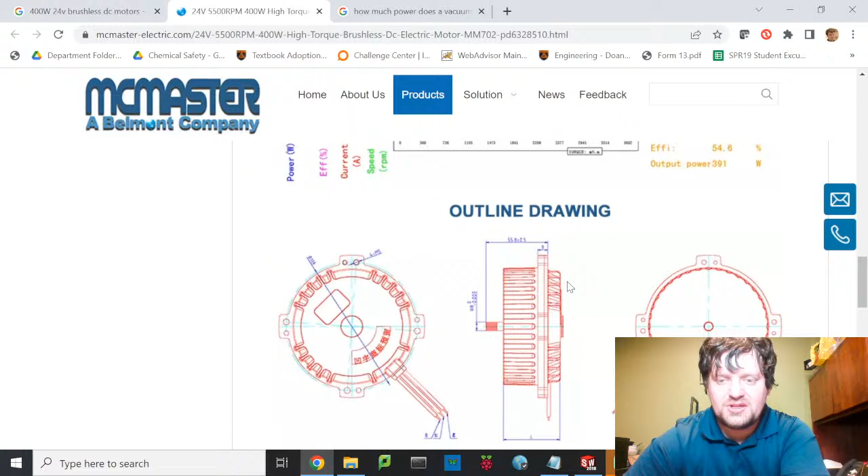So here it'll tell you at max efficiency, here's your speed, here's your current, here's your torque, here's your efficiency. It's just all these things. All of this is really good to know. I'm going to go ahead and take this brushless DC motor, and you'll notice this does have some specifications to it. I can't really see it because I'm blind.

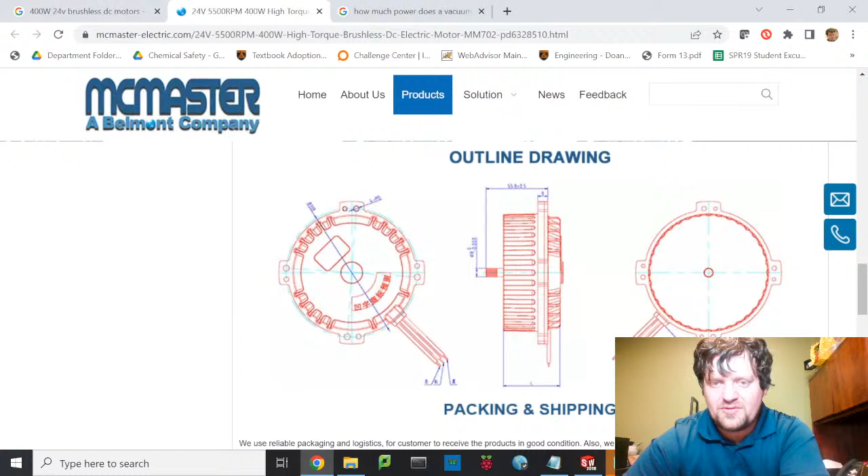But the outer diameter of this motor is 119. Looks like there's a 9 millimeter bridge right there. You have that long of a lead. Wow, it's really not a lot of information. But this does give me enough that I could probably redraw this in SolidWorks if I needed to.

Here's a bunch of the other specifications. So when you're looking up a motor, the piece that you need to have most importantly is this information down here, which gives you your load, your speed, your current, your torque. You need to understand those. Now here I have the ability to pick between these. All of these are 24 volt. All of them have 71 millimeter lengths, which I would assume would be from here to here, 71 millimeters.

Here the power output in watts, we're probably going to want the highest level one, just because. Although it is going to be a little heavier, it is going to have a higher current draw, it's going to have higher speed. These are the shapes of the diagrams. It appears what they did was they gave these values according to the specific models, and then they basically showed, here's what you would expect out of the performance.

So here, current linearly increases as the torque increases. Speed linearly decreases as the torque increases. Your efficiency pretty much decreases as the torque increases, and the power has kind of a parabolic shape. So that's kind of what this shows. You can look up here and find the actual values to plug in and recreate the curves yourself if you really want to.

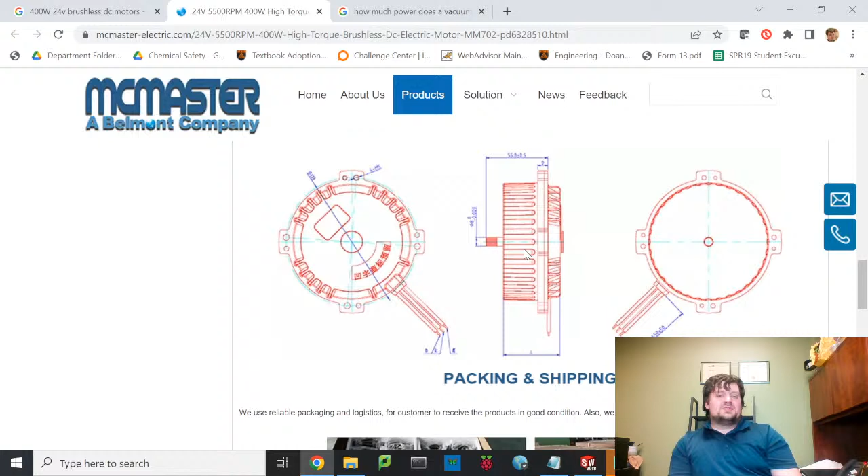Now I will say I am not going to try to recreate all of the screws, those little fun dimensions. I'm going to have to make estimates about the lip size here. I'm going to have to make estimates about the distance between those bolts. Really what you would end up doing is you would buy one of these, or you would ask the company for more detailed specifications on the part. They may actually provide you with CAD drawings themselves, which is likely what would happen.

They give you CAD drawings and you say, hey, I want to forge an alliance with you, and you go and raid small kingdoms together or something.

But that's what the inquire button here is for, is to get the CAD drawings. They don't usually post them publicly because people can steal your intellectual property that way. So they make you use the inquire button so that if you steal their intellectual property, they know exactly who you are. Fun times. There's an email address associated with that. I don't want to give them my email address, which is why I'm just going to make this up myself. So we're going to take this, we're going to try to recreate this, and let's go.

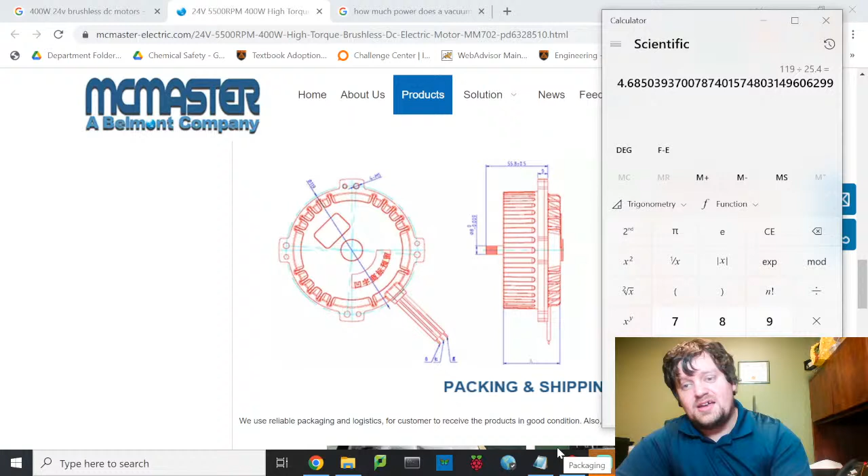Now before we really get started, this is 119 millimeters in diameter, 71 millimeters. I'm an inch guy. I like inches. So I'm going to take 119 divided by 25.4, and that is 4.685 inches, which is really close to the diameter of my fan. So heck yeah, that means that my parts will fit together really well, thankfully. All right, so going back into SolidWorks, I'm going to create a new part.

Now, if you made a full model of a motor, you would have the motor housing, which has all of the electronic components, the copper wire, all of the control sensors, that type of thing. That's all one unit, and then you have a shaft that spins independently. You could model it as two parts realistically, and then you would be able to actually power the motor through. I am not going to be modeling this as two different parts because, you know what, I'm tired.

I have a life. At least that's what my mom tells me.

So I will not be modeling the entire thing. Instead, I'm just going to be modeling the motor itself and getting a very rough outline of how the motor looks. As I've mentioned, an exact model of the motor you could get at least the dimensions for by discussing it with the vendor. They would allow you to have that so that you could put that into your own design and plan for that exact specific model.

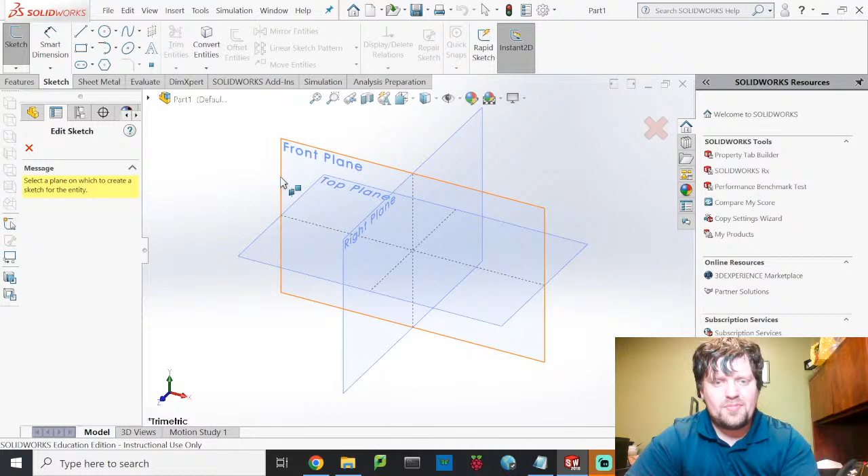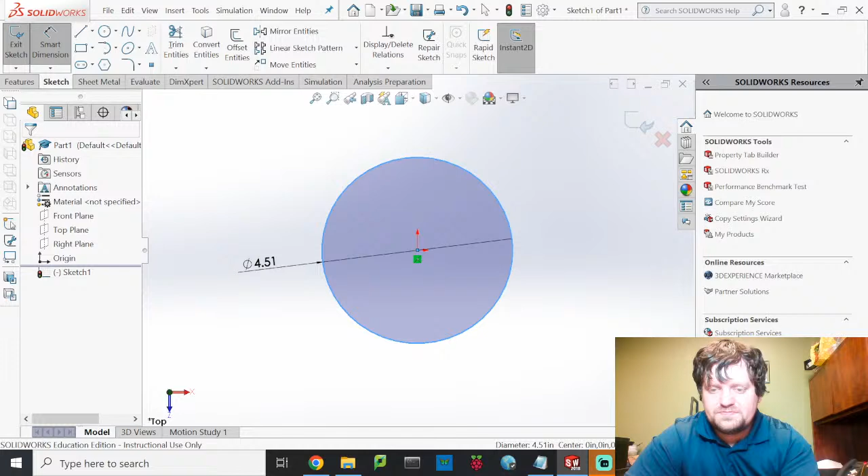But I don't care. I'm not going to try, and I don't want them to have my email address, and I don't want to get the spam email for the rest of my life because I looked this up one time during class. No, I'm not salty at all. What are you talking about? And I was going to laugh because I'm talking to myself, but really every one of these videos I record, I'm talking to myself.

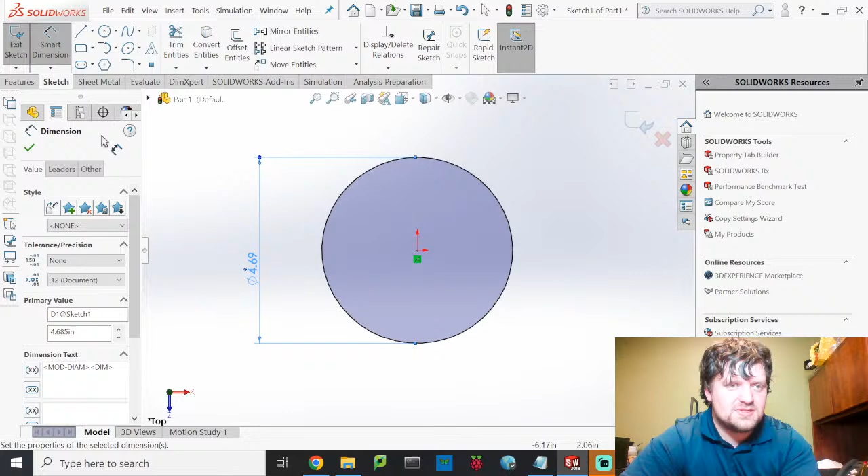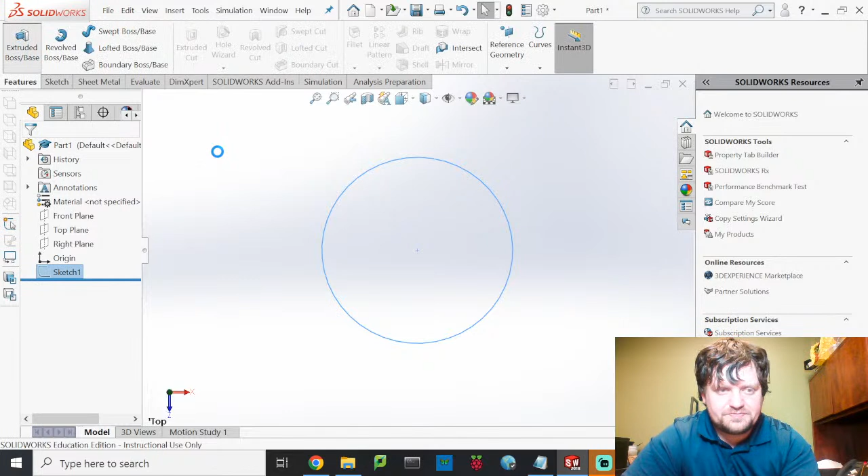So we're going with 4.685 inches. There we go. There's the outside sketch. Now here, if I go back to my dimensions, this is 71 millimeters. That's the extrusion depth. So 71 divided by 25.4. So we'll jump back into this. Go to extrude. And I will do a blind extrusion.

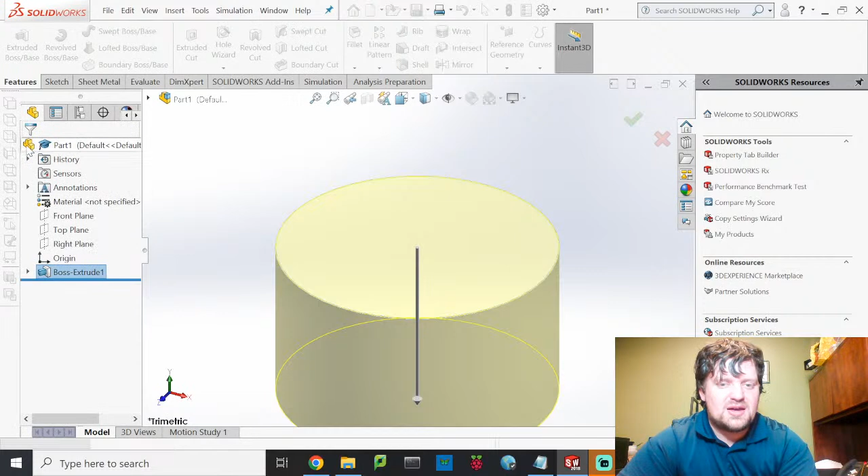2.795. Now I am going to switch the direction real quick because I want the origin to be up here. I'm going to draw the actual motor axle coming out that direction, and I want this to be at the base of that motor axle. So just a personal preference. All right, gonna draw that motor axle. Putting it at the center. Does it give me a diameter for it? No.

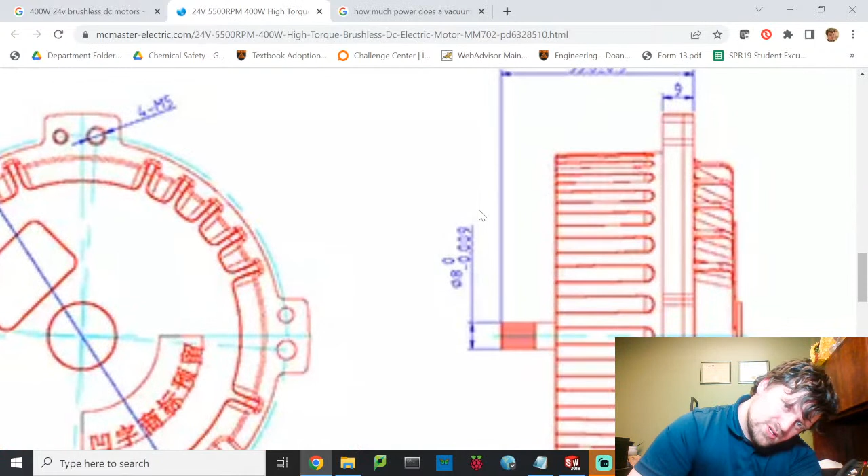That is a diameter of 8 millimeters plus 0 or minus 0.009. That's tolerancing. Basically, when they give you a tolerance like that, you can expect it is at most absolutely 8 millimeters, not more, but it could be as much as 9 thousandths of a millimeter less. So that's what tolerancing does.

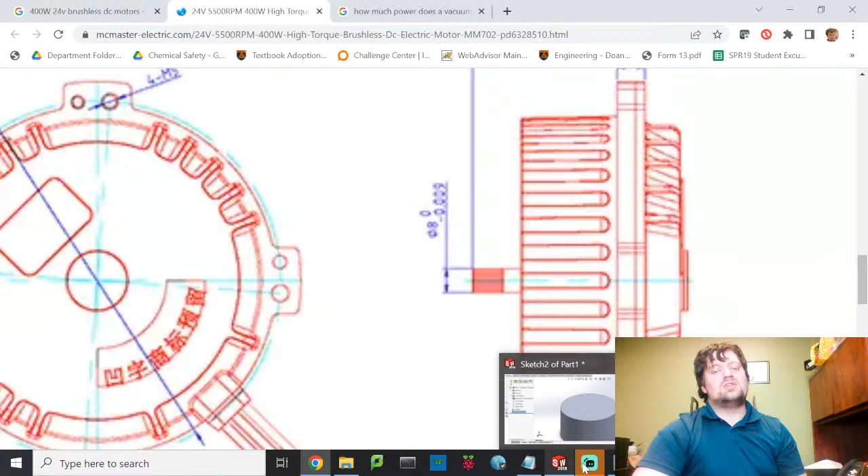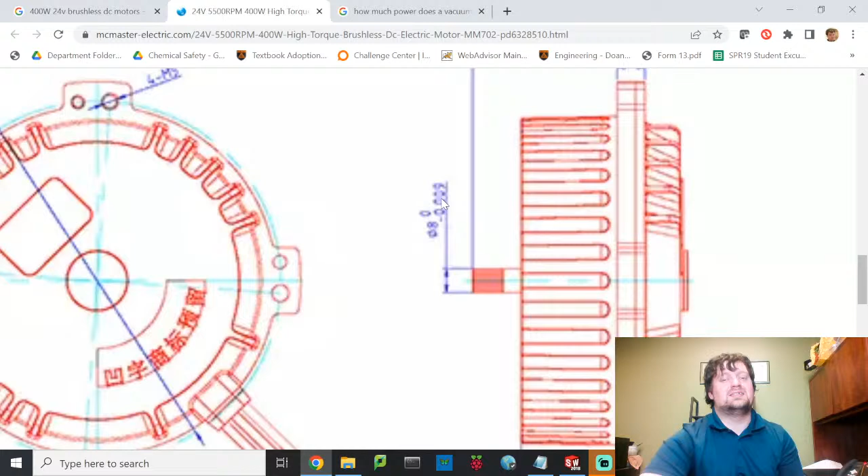For someone like you or me, that means when we go to fit it in a hole, if we want a regular fit on this, we would get a hole that has 0 at the minimum, but maybe plus 0.009 so that there's a little bit of space so we can slide it on. If you want an interference fit, you would want maybe minus 0.009 as the maximum, and then maybe minus 0.018 as the minimum. So that's kind of how tolerancing works.

Here, this is 8 millimeters. We go ahead and throw a dimension on this, and then figure out what is 8 millimeters. It should be 8 divided by 25.4, 0.315.

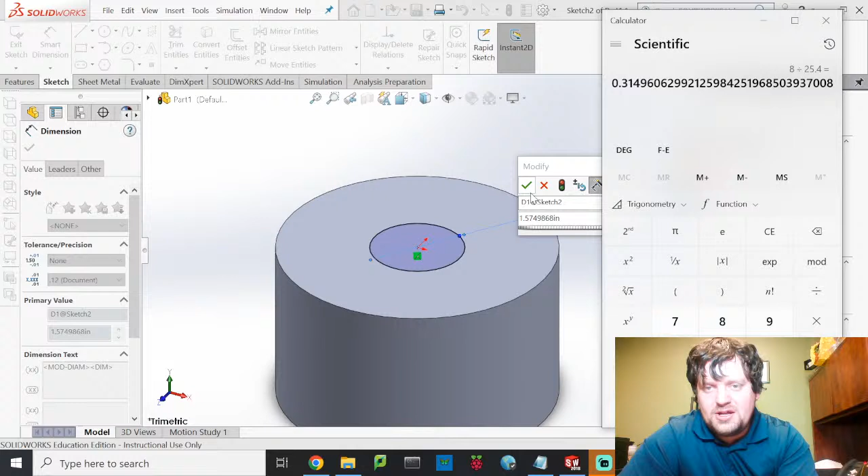0.315. A little bit more than 1/4 of an inch. A little bit less than 3/8 of an inch. All right, so there's my motor shaft. I'll exit sketch, see if it gives me a length on this, and the answer to that is no.

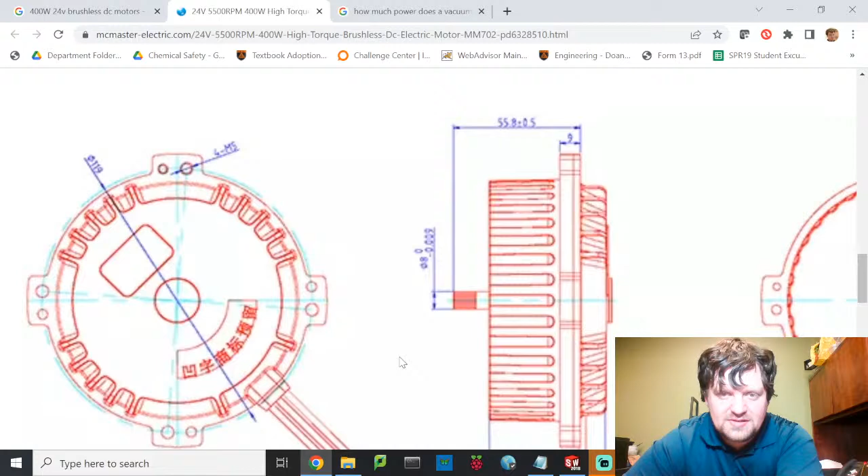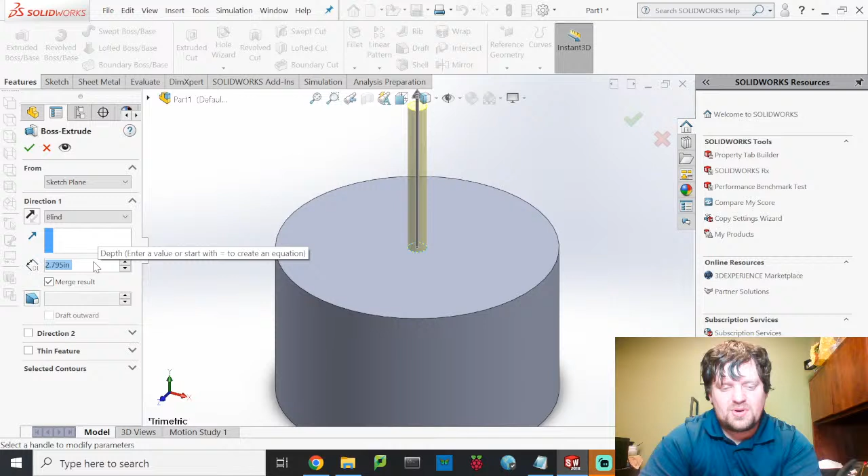So, go back to SolidWorks, and I'm going to estimate a length. I'm going to estimate a length of, I don't know, about an inch, maybe. Maybe less. Maybe more. Maybe less. Maybe more. Yeah, I'm going to go with 3/4 of an inch. So this is going to be 0.75.

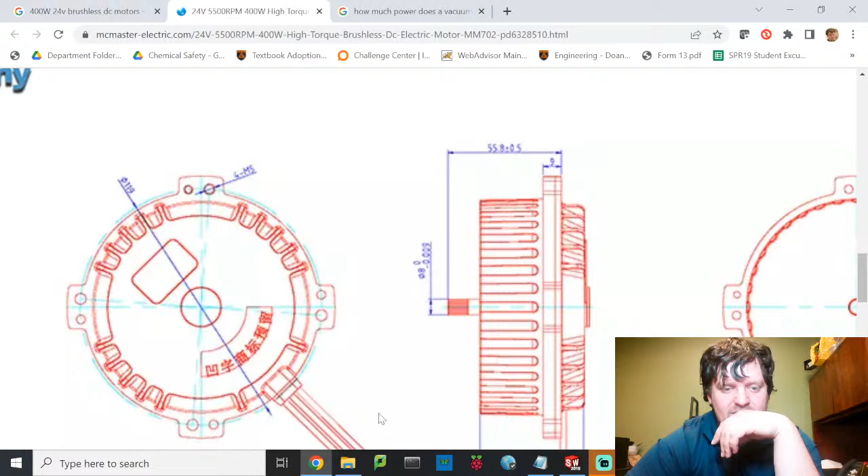Extrude it that way. And hit enter. Hit yes. Look at it from the side. Does that look like what I have here? And yeah, it actually does. It's really close. Now here, there is a little ridge, a 9 millimeter ridge. It's located about 55 millimeters below the tip of this thing.

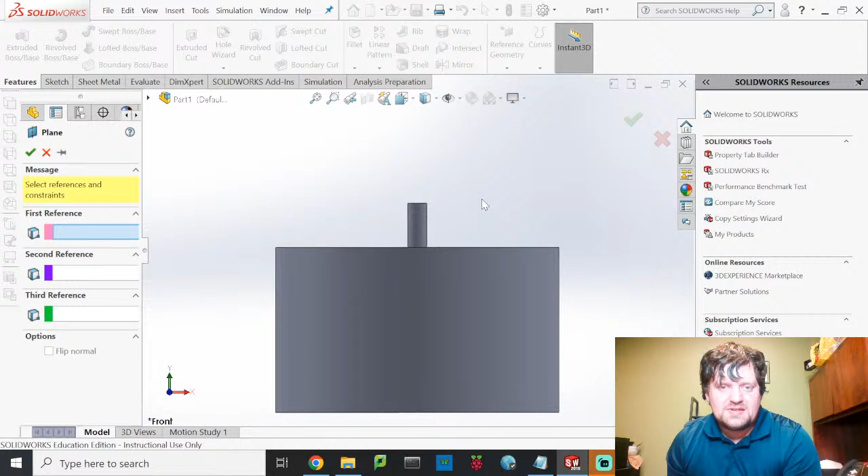So what I'm going to do is I'm going to create not a sketch, I'm going to create a plane. And what I'm going to use as a reference is the point that I was given for the measurement, which is this face right here. And it's going to be offset this way by whatever that value was, 55 millimeters. So 55 divided by 25.4, 2.165.

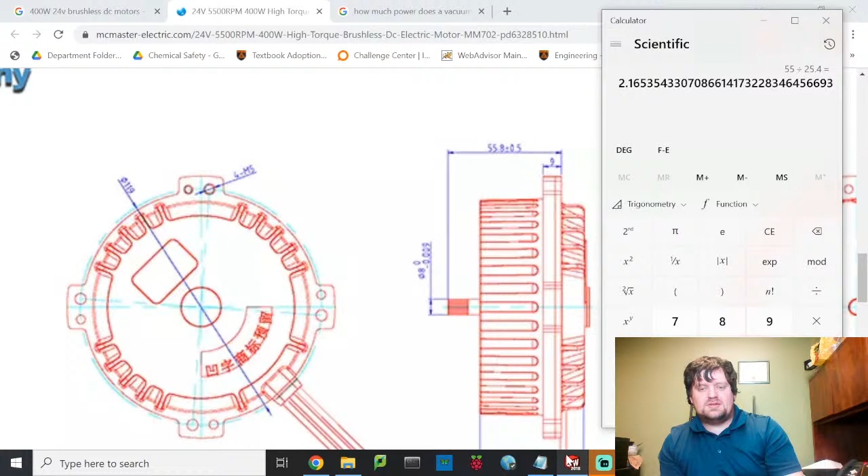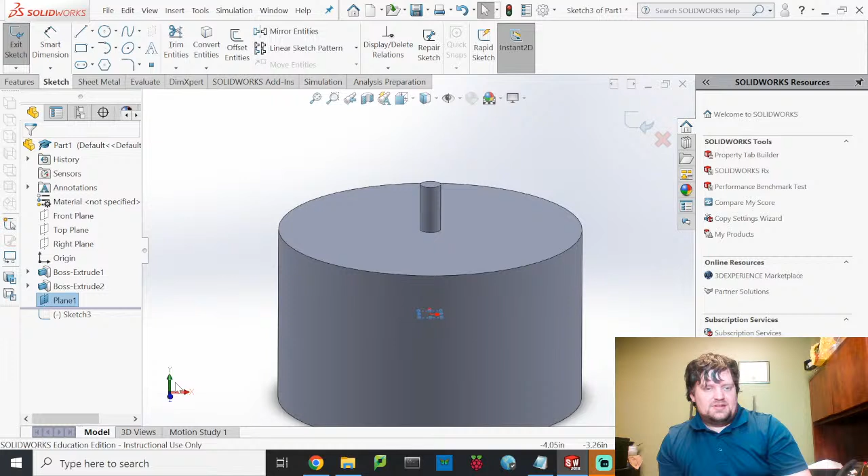So 2.165. Enter. And there's my plane. It's right in the middle of the object. Nice. But it is fully defined. I hit enter. I have that plane still selected. I go into sketch, I draw a sketch. I'm going to zoom into top view, and I'm going to draw a circle.

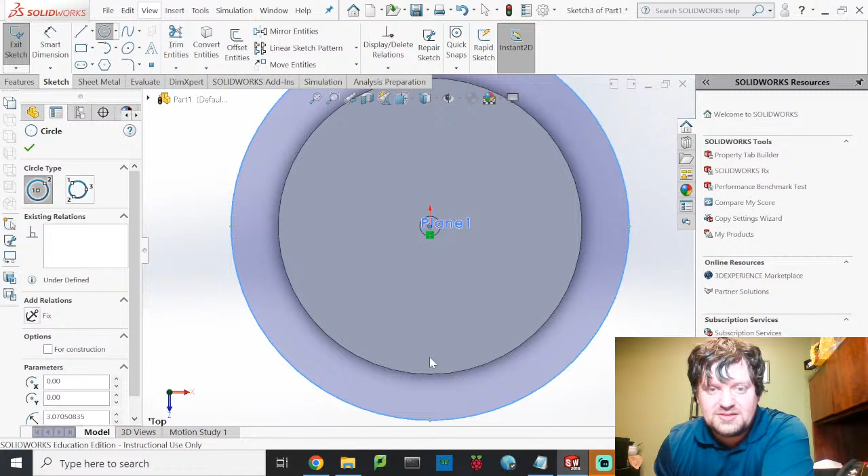Now this is a ridge. Looking at this, it does not tell me what the diameter of that ridge is really. I mean, I guess that ridge actually is the 119. Oof. Didn't see that. Well, that's 119 from here to here. This is less than 119. I don't know what that diameter is, so you know what? I'm just gonna pretend that this is 119. Dang it. Alright, so 119 divided by 25.4.

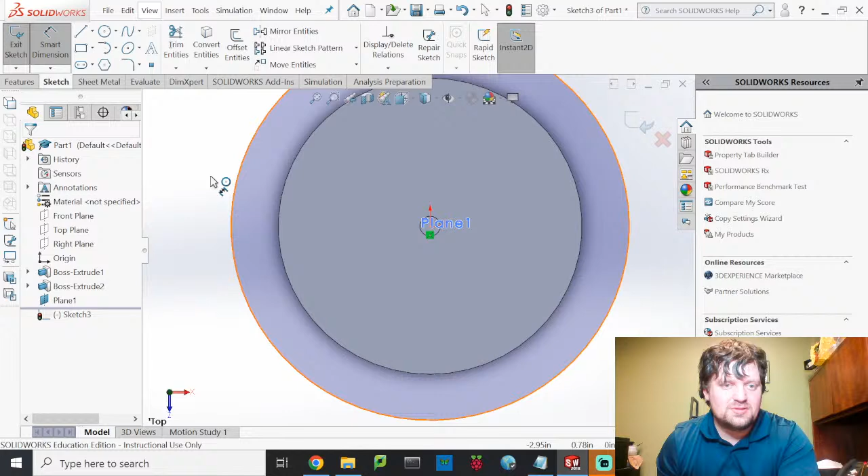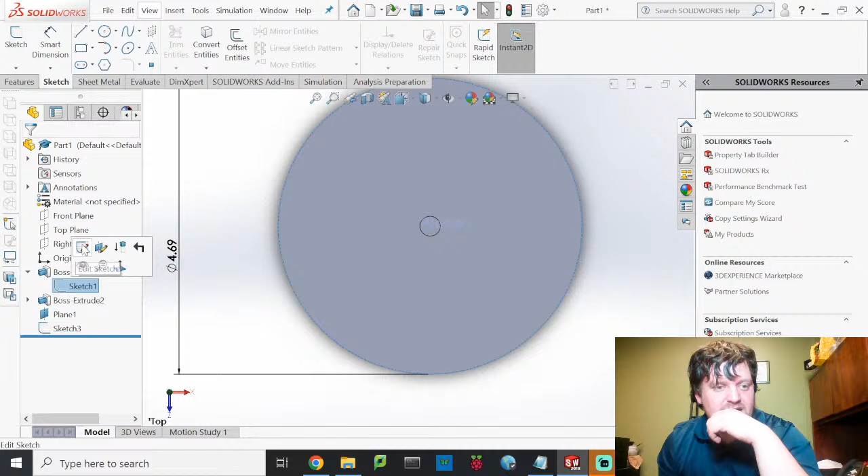Okay, so I drew a circle, 4.685 inches, and then I'm going to have to go back and adjust my other circle because I got that one wrong. .685. And we're good. Now before I go and extrude this, I'm going to go back to my original sketch, and I'm going to say, you know what, we'll make this an inch smaller. This will be 3.685. And then we'll hit exit sketch.

The nice thing about SolidWorks, being what it is, you can always adjust.

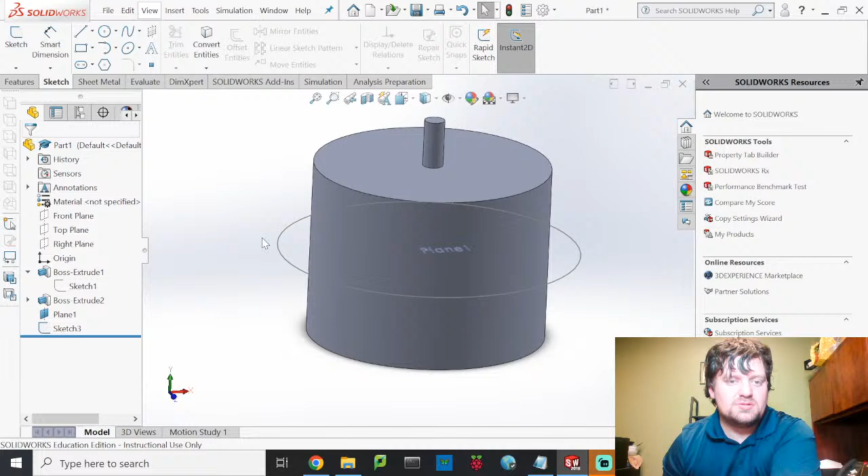Look, it kind of looks like, oh, I can't say that on YouTube. Uranus. I said it on YouTube.

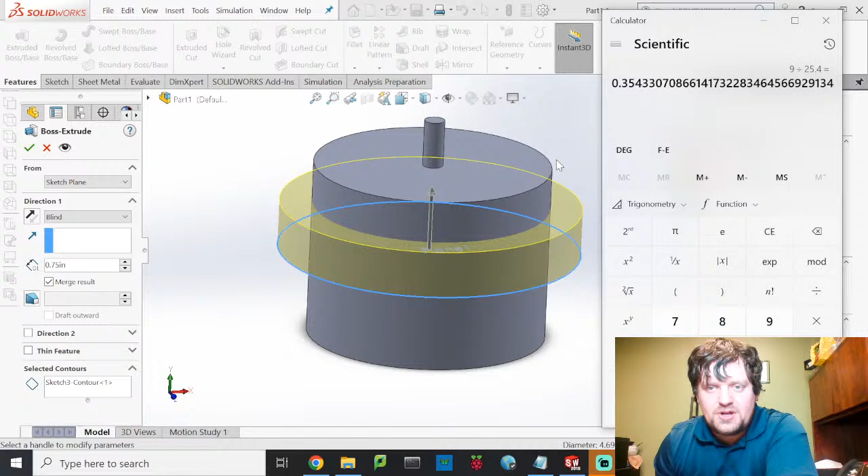So now I'm going to extrude this part upward. And this one was, the lip distance was 9 millimeters. So 9 divided by 25.4 should be around 3/8 of an inch, a little bit less. 0.354. So here, 0.354. Enter. Hit yes. And there we go.

Now, a couple of last minute housekeeping items. There are 4 mounting holes located around the edges here. They are drilled in this flange itself. This is what is used to connect this motor to some kind of a structure. So I need to put in all 4 of those holes.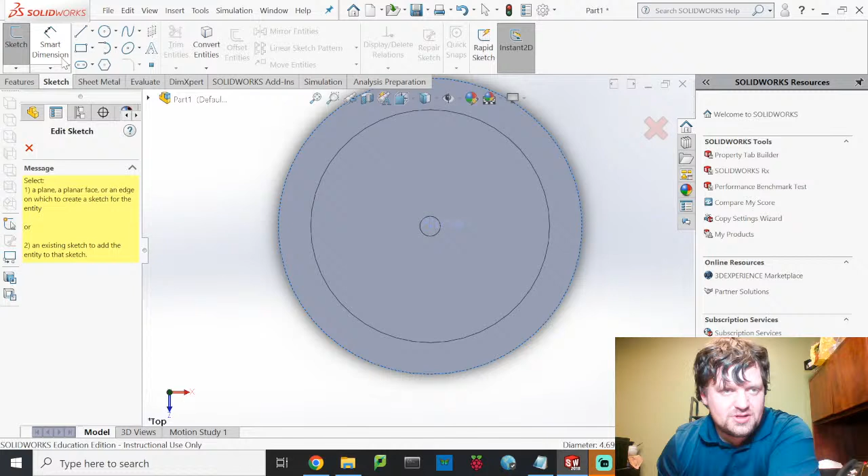Okay, so I'm going to zoom into top view, go into a sketch, going to draw a sketch on this plane down here. So I click on that face. Going to draw 2 circles. Well, I'm going to draw 1 circle. I'm going to draw a construction line, because I love me some construction lines.

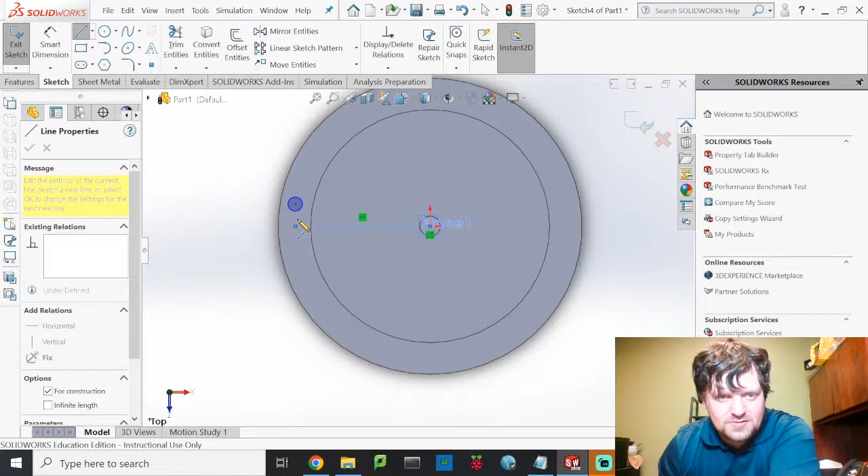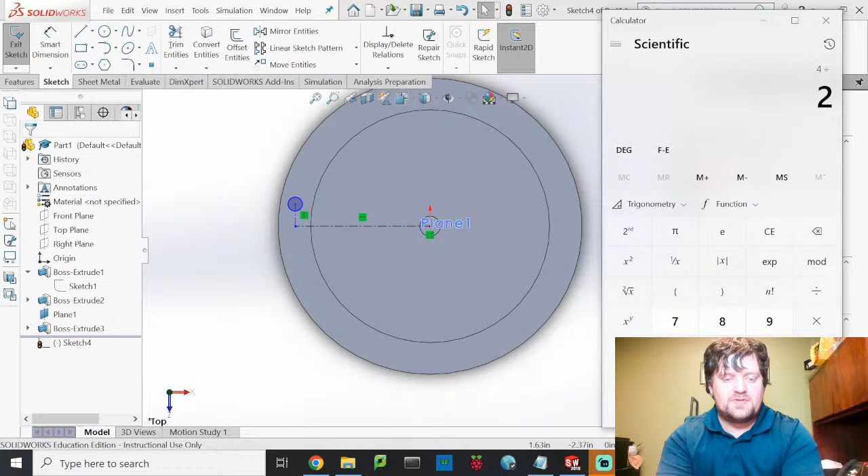Escape out of this. And then, according to this drawing, that is a 4 millimeter hole. So I will go in here and I will find out what 4 millimeters is. 4 divided by 25.4, 0.1575. .1575. Tiny.

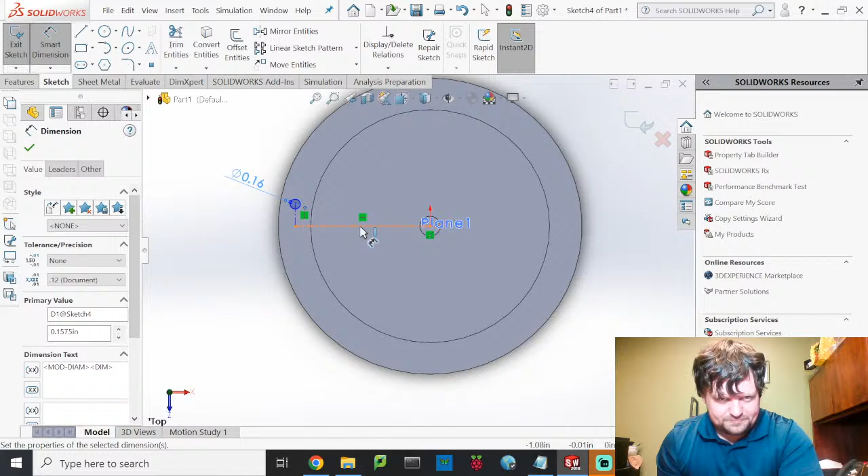And then what I probably could do is I could probably just try to center it between these two, which means I need to delete this constraint and move this over so that it's here. Now what I will do is I'm going to click on this line and then control click onto this origin, and I'm going to make them be coincident. So they're pointing at each other. Okay, so that's good.

You know what? I'm just going to delete these 2 lines and try again. Dang it, Kale.

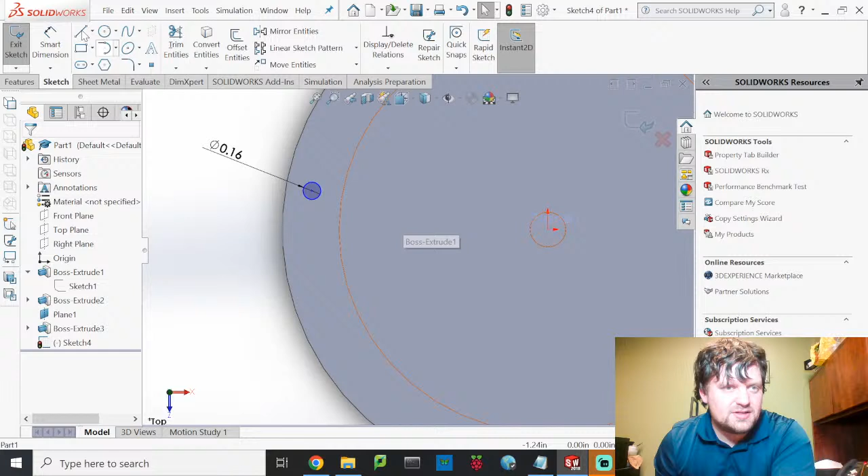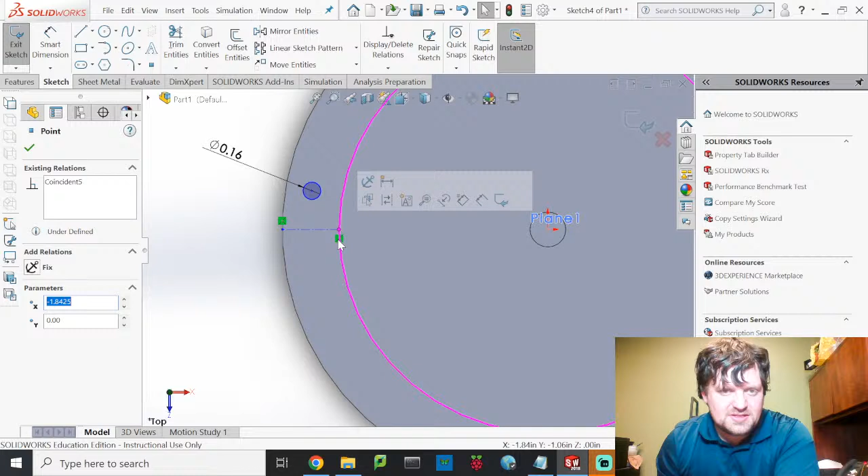For construction, it's going to go from this curve to there. Hit escape. I don't want it to be tangent, so I got to delete the tangent, but I'm going to connect it right there. You'll notice that because it's on the midpoint, it is actually connected. It's coincident. However, I can move it up and down. So with that line selected, I go back again and select this one, and I make them coincident, which should fully constrain this line.

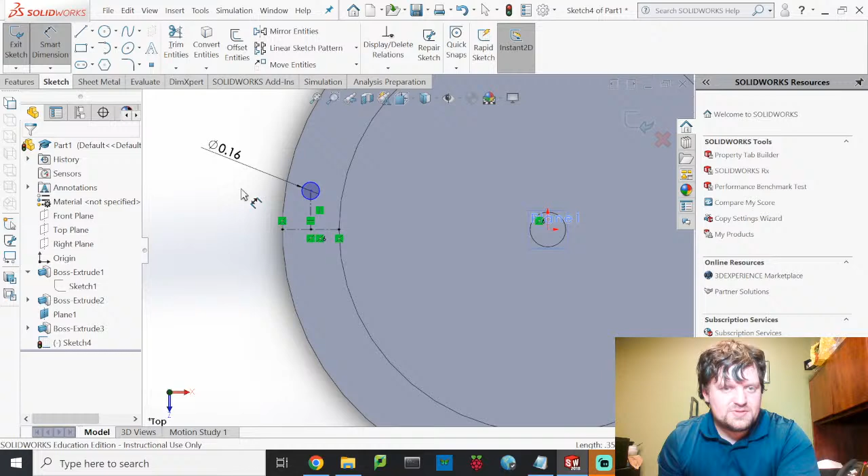Oh, I need to set this as horizontal. That's right. And that should fully constrain that line. There we go. Then we'll do another construction line from here up to this point here. I'm going to make this line be vertical. And we're good. We'll do a smart dimension. This piece here. And then we'll say, well, it didn't really give me a dimension, so I'm just going to put it at 0.125, about 1/8 of an inch.

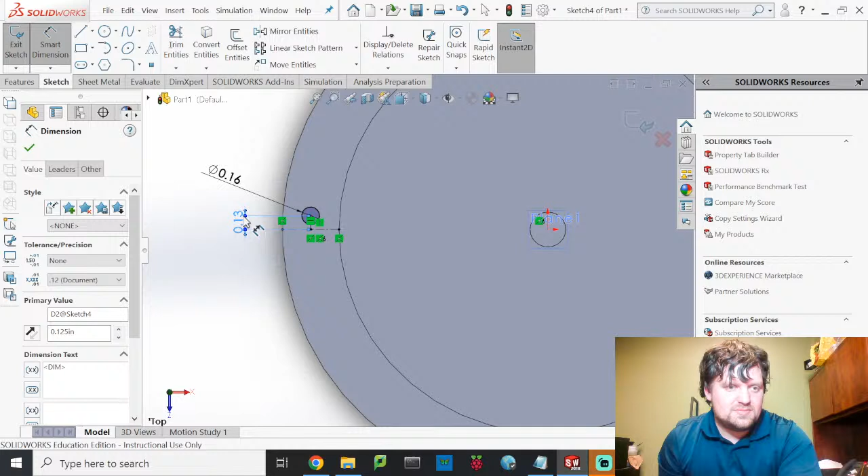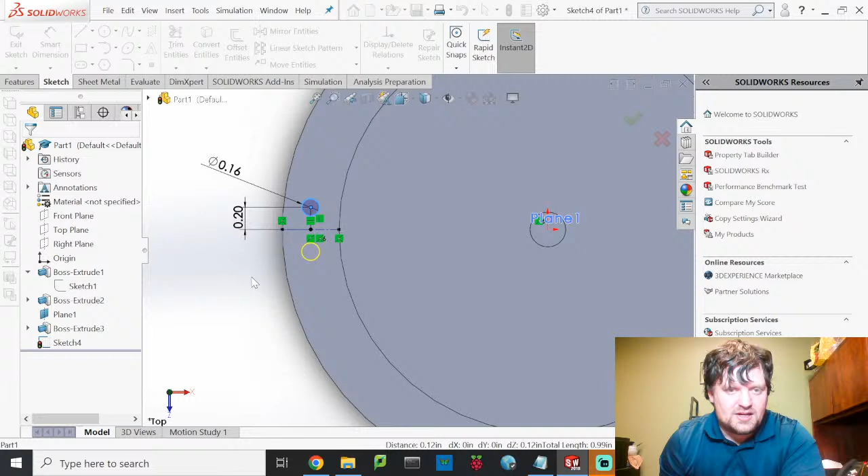Nice. Probably should do a little bit more than that. Maybe 0.1, maybe just 0.2. Okay. A little bit of a gap. We'll hit OK. I will then want to mirror an entity. The entity I would like to mirror is this one. I want to mirror about this. Hit yes. And there we go. I have 2 holes now. Okay, hit exit sketch.

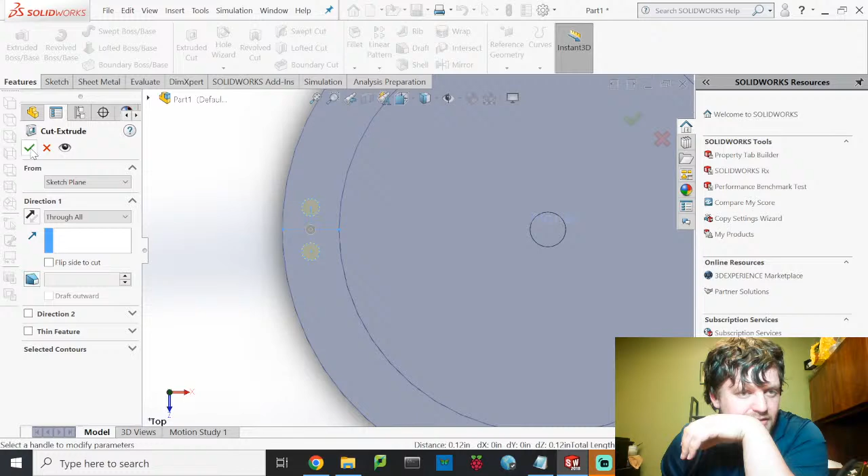Before I do anything, I am going to do an extruded cut. I'm going to have it go through all. So here, through all. Hit yes. Okay, and now all I need to do is just mirror those holes 4 times around, which is what we see here, the 4 mirrored holes around here. So to do that, I do a circular pattern. I still have the cut extrude selected, so it's going to automatically say that's what I want to do.

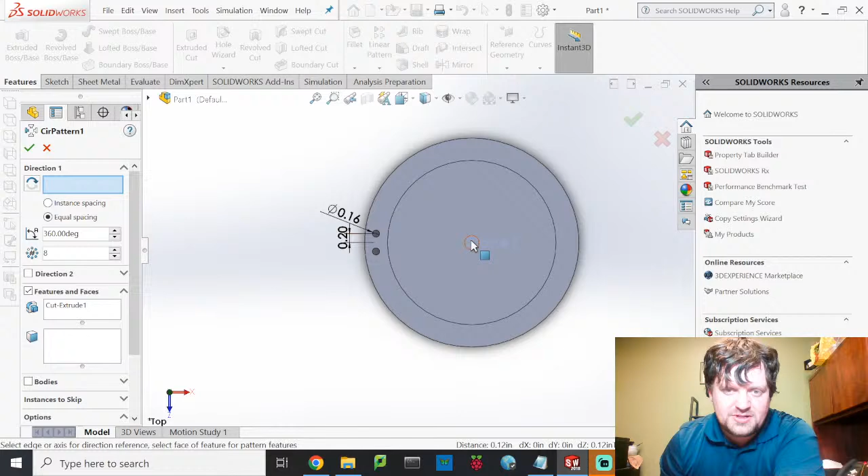The direction, I have to pick an axis. Here I want it to go about the center. Well, there is a center line there. I just have to go to hide, show, temporary axes. And when I do that, then you'll notice there's an axis there that I can select. Okay, now here I want an equal spacing, but I only want to have 4 instances. So I hit enter, and notice it pops up 4 times. And I hit OK.

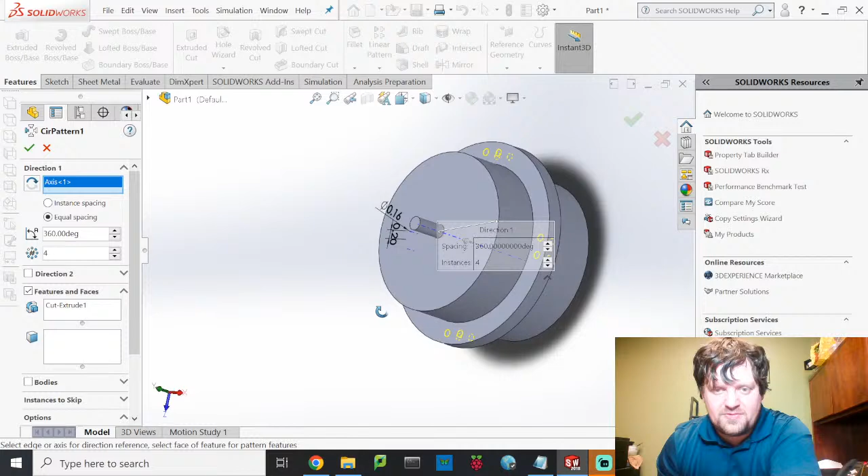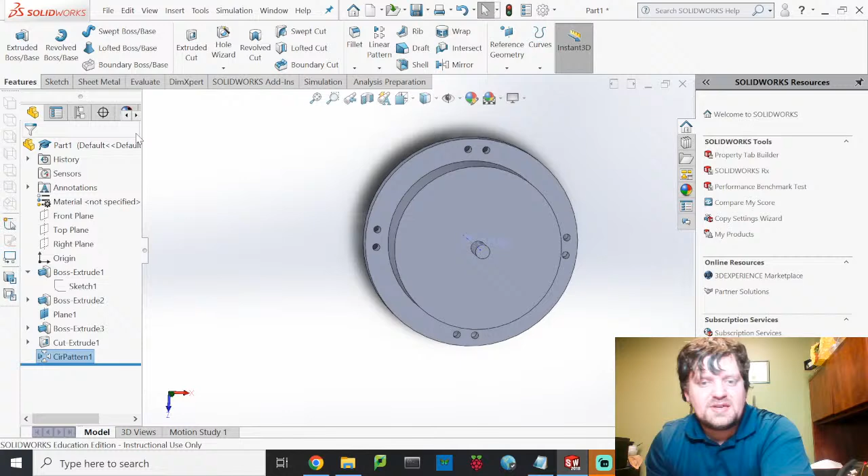And that is my motor design, including the motor mounts. Ha. So that's good, because now I can use this anywhere I need to mount it. I will need to make sure that I get appropriate bolts that are the size of these so that I can actually connect the motor, but we'll deal with that later. So start by saving this piece. I'm going to save this as a motor, but that's not the only thing I'm going to do here. Here this is, I'm just going to call it motor, hit enter.

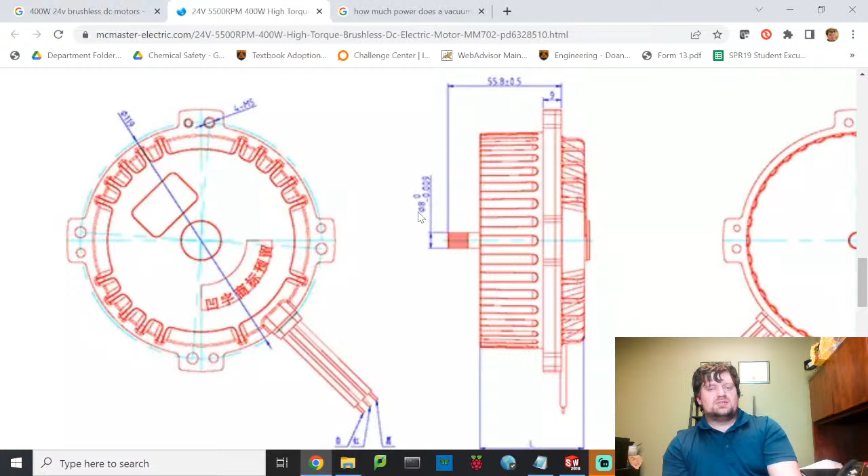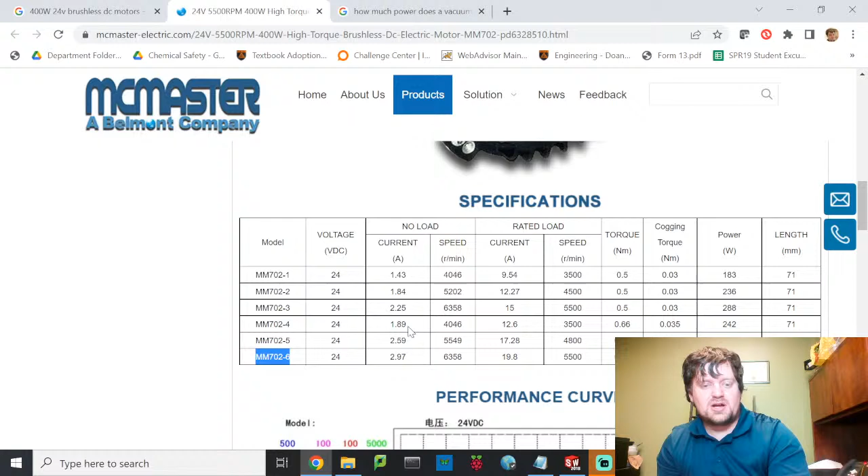But before I really jump out, hit reset. Before I really jump out of here, I need to make sure that I also get the motor number. So here, I'm going to be grabbing this motor number, copying it, going in, changing the name of the motor to include the part number. Okay, but that's not all. Oh shoot, I gotta shut SolidWorks off. Bye. Try again. Or I might have just broke my computer. You never know. But I saved it with the motor part.

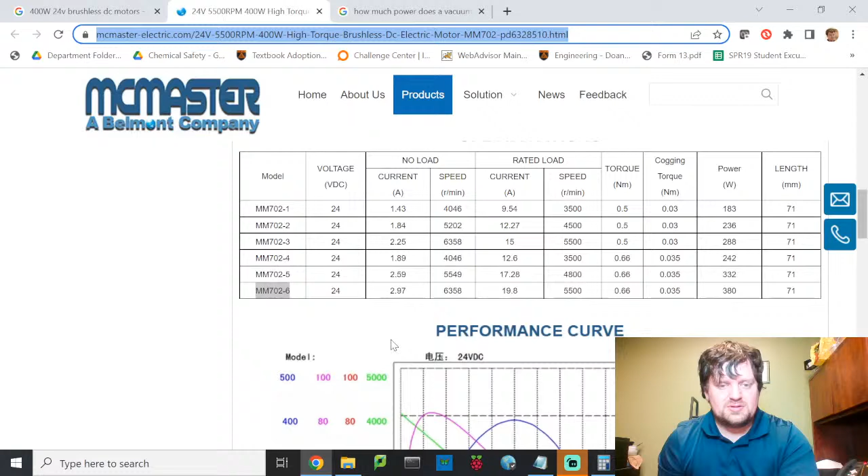Something else that I like to do, and something that is good practice, is just come up with a document and then just say parts, numbers, or something. So any part that you're planning on including in your document, keep a way to find it. Okay, so here, I can copy this website. That's one way to find it. So motor specs, copy the website, copy the part number, or here, just screenshot it, print screen, paste. Okay, and here I've got the highlighted one that I want. I could crop it down so it only shows that, but eh.

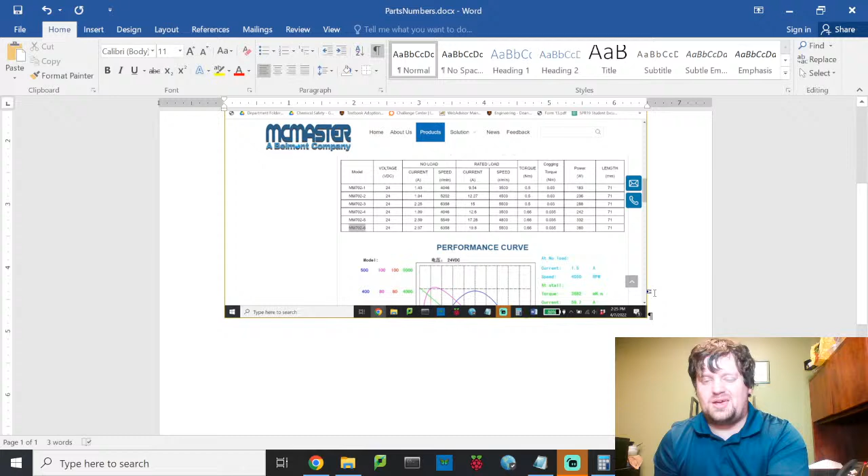And then I'm also going to go in here and pick the overall design, screenshot that. Basically just giant plagiarism here. But I want to keep this information so that I can take it and use it later. I'll also take a screenshot here that has all of this information, and I'll put it up at the top. So there we go. So now I have chosen my motor specifications. I've picked my motor. I have all the details here saved in this document.

I'll hit save, cancel out, go back in here, and I have completely designed my functional components. For the remainder of these videos, we're going to be working on assembling a hose, battery, intake, piping, all of those fun things that really forces this thing to come together. But we will do that